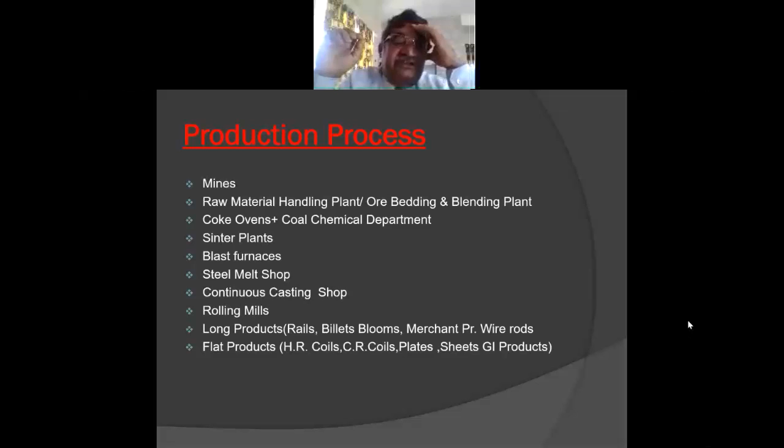Steel is a versatile commodity that plays a major part in everybody's life. As SAIL's slogan says, there is a little bit of SAIL in everybody's life. Whatever you are doing, whether eating, cycling, or anything in your household, many articles are mainly made of steel. Why is it so? Because it is a high strength and resilient material, plus it has the advantage of getting recycled every time. Nothing is wasted in the steel industry.

Since time immemorial, after the Stone Age, the Iron Age came, and from then onwards iron and steel is an industry which has never left humankind. Although many other materials have come up as alternatives, steel is still to be replaced for many applications. It is a very high strength and resilient material.

Most metals are recycled again and go into the melting process. You will also find this as the largest category of material in municipal waste. If you drink a cold drink, the can is made of steel, and anything you touch, you will definitely find some steel in it. So this is the largest category of material being used all over the world.

Now, before knowing the solid waste generated in the steel plant, we should know the process. It starts from mining, then the raw material handling plant. From mines, the steel plant receives material like iron ore, coal, then limestone, to name a few, and they come to either the coke oven coal receiving yard or the ore bedding and blending plant. The coke ovens I will be dealing with one by one, definitely.

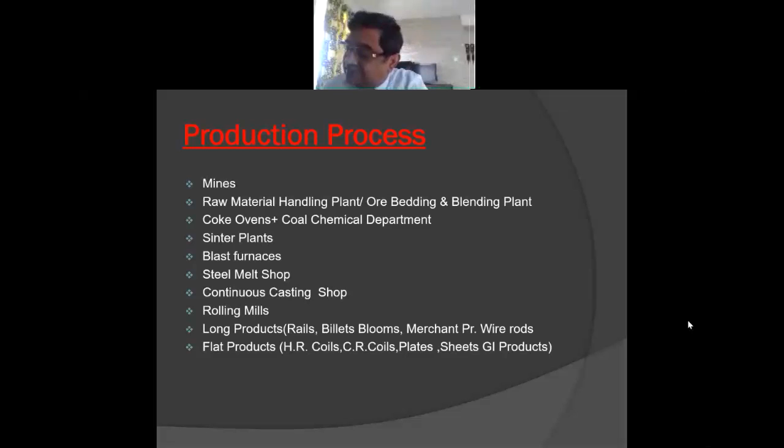So all these processes definitely produce some kind of final finished products and some side products which were called solid waste in earlier days, but now we call them byproducts, as we find some use of this solid waste, chemical waste, gaseous waste, or sludge. We find some use, and these get recycled and regenerated. Hence these are now called byproducts, which help in getting revenue for the plant.

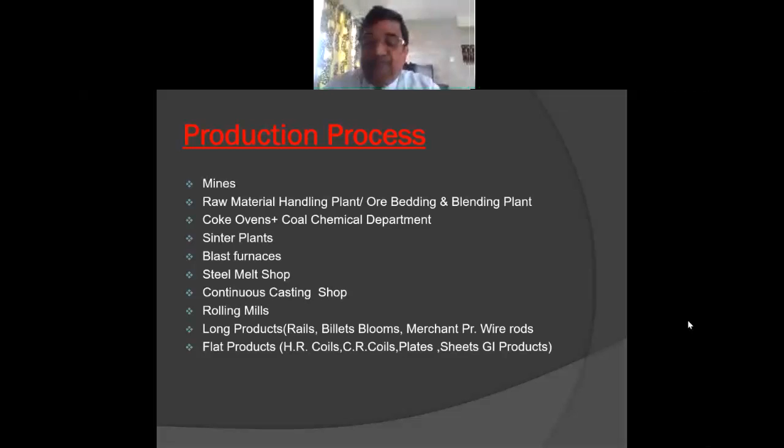So mines, as you know, iron ore, limestone, dolomite, etc. are mined and transported to the integrated steel plant. Mines, I will not deal with in detail, but that also creates a lot of iron ore fines, which earlier were not getting used. Around 60 to 70% was getting wasted as fines.

So all the researchers put together and found out how to make sinters, which are chargeable in the blast furnace, as you must know, being engineers. So the sinter plant was designed and made to work for getting these fines used.

Because in the sinter plant we try to make cakes. We mix it with some conglomerate, and this total mix is passed through the furnace, and this gets fused together. It is basically coke breeze, iron ore, and binding material like lime. When heated up, this gets fused and forms into cakes, which are then broken into chargeable size, and as sinters they are charged into the blast furnace.

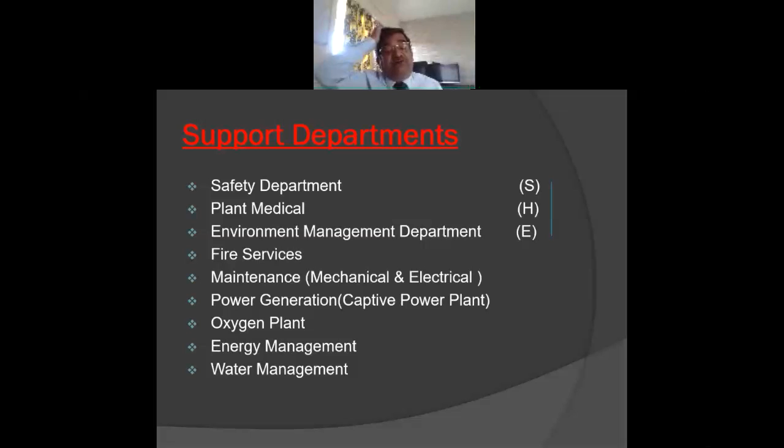Am I getting boring? Please, Madam Sunita, am I getting boring? No, sir, not at all, sir. If it's getting too much, you can stop me in between, no issue.

So that is a place where material is mixed in a proportion and laid as a bed, and blending is also done of different materials for charging into the sinter plant base mix. That's why it is called OBBP, and the raw material handling plant receives iron ore, dolomite, limestone, and all materials which are supposed to be fed into the blast furnace for making iron, hot metal.

And the other stream is the coke ovens, where the coal handling plant handles the coal for coking coal and other types of coals, mixed in different proportions - basically prime coking coal, secondary coking coal, and normal coal dust - mixed in certain proportion, and charged into the coke ovens, where it is heated in absence of air to form coke.

Now this coke is fed into the blast furnaces. So once in the blast furnace, as you know, it is mixed with sinter, iron ore, and coke, and hot air is blown into the blast furnace through tuyeres, making the hot metal. The melting takes place slowly, and it is collected in the belly, which is tapped into the furnace through tap holes, called for tapping the hot metal.

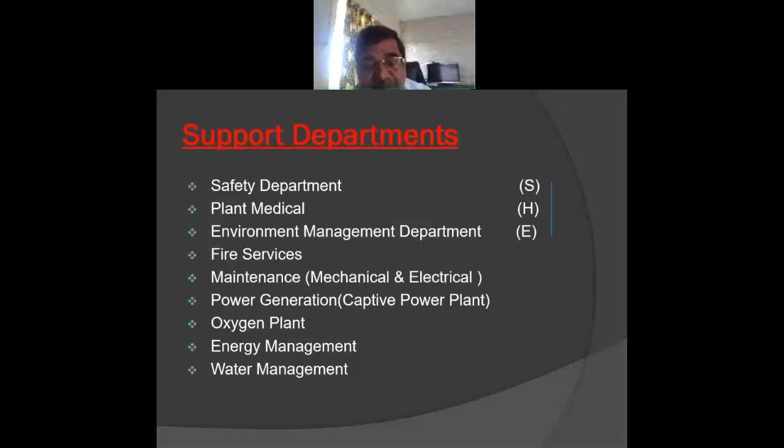Along with the hot metal comes the slag also. The slag, being the lighter material, is basically made of calcium silicate, and this blast furnace slag is passed through a screen of water, meaning water is sprayed onto it, making it into small granules - that is called blast furnace slag. This slag is collected and taken to the slag yards, blast furnace slag yard.

And hot metal is taken into hot metal ladles, and they are taken to the steel melt shop. Now, in steel melt shops nowadays, nobody uses open hearth furnaces. It is basically LD converters or basic oxygen furnaces, because the hot metal is collected in the converters and oxygen is blown into it, where carbon is reduced to minimal level, and then carbon is added back.

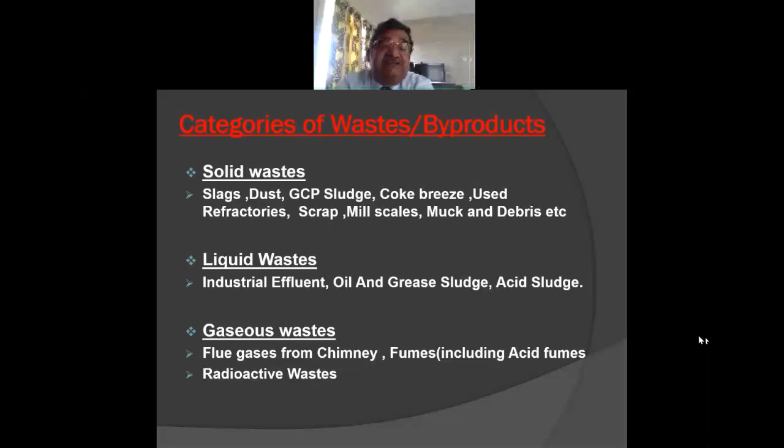Rails must be of high carbon, but carbon makes it more brittle, so some alloying elements are added to make it more ductile. Now this steel which is coming out here, the top portion, the slag is floating. So first the slag is tapped out, and this is called basic oxygen furnace slag, or LD slag.

And from the lower area of the converter, this hot steel is tapped into steel ladles, which goes again to the continuous casting shop, where it is cast into slabs, blooms, or billets for further rolling. Rolling mills can be of two types: for long products, that is rails, billets, blooms, merchant products, wire rods; and flat products like hot rolled coils, CR coil, plates, sheets, and GI products.

GI products means it is hot dipped, galvanizing is done for giving a coat for durability. Similarly, hot tinning lines are also there, where hot dip tinning is done.

So today my topic is not steel making. Today my topic is waste management in the steel plant. To give you an idea, I have given a little bit of the production process, so that you understand all these processes generate some waste which has to be managed. This is a big challenge, which you will see in the next slides.

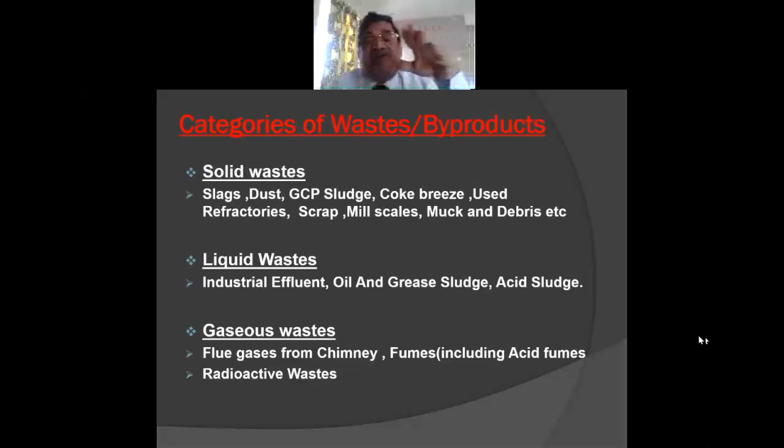We also have environmental concerns. All these wastes are to be processed in such a way that they give minimum impact on the environment. The steel industry is a very polluting industry, and that's why at each stage there are a lot of pollution control equipments to control the emissions and contaminations. With this, I will also go to the next slide.

Now these are the supporting departments. In the earlier slides, I showed you the main production units. Now these are some of the supporting departments. The first is safety department, S. Then plant medical, that is health, H. Then environment management department, that is E. So you must be seeing SHE.

This becomes the most important aspect today in the steel plant: safety, health, and environment. Because as you know, the steel industry is a very polluting industry, and there are a lot of dangers in the total process. So we have given the most priority to safety of the people, health of the people, and the environment, which is available in the plant or in the townships. We are giving full attention to this, and today all the steel plants are really gearing up to make this atmosphere very clean and environment friendly. And for that, all the ISO systems are being followed.

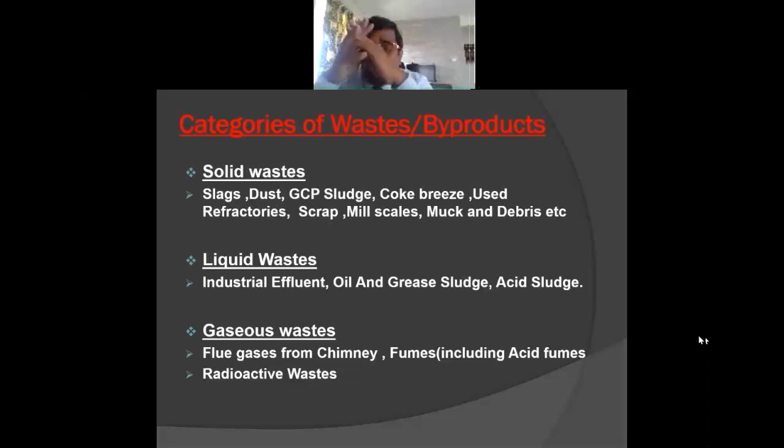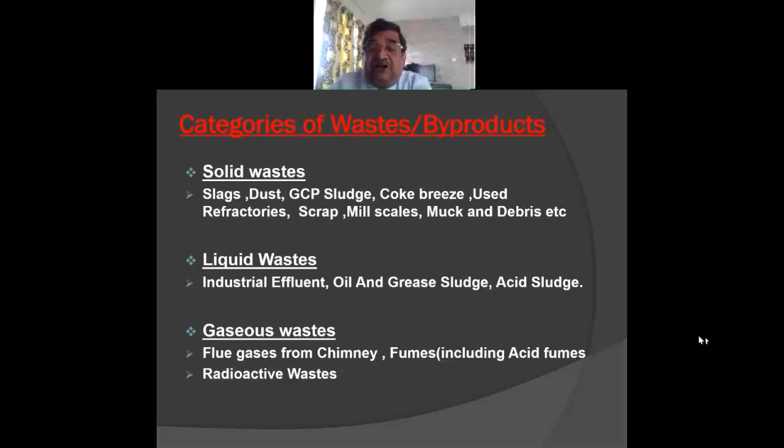Then fire services is another important department, because as you know, we are dealing with fire, heating, and hot metal processes. So, fire services, and then the maintenance department, mechanical and electrical, since all the equipments are to be maintained.

Then power generation is another area which is very important and very polluting. Power generation requires a captive power plant; although we take power from the outside grid, there are certain equipments which are supposed to run continuously without fail. So for those, we have to have an alternate source of power, and the captive power plant exactly does that, because there are many areas which, if they fail, will create havoc in the plant through leakage of gases.

You must be aware that many times cases have happened when the blast furnace gas has leaked into the atmosphere, causing deaths also. Then another area is the oxygen plant. It is normally there for getting oxygen for blowing into the converters.

Then energy management is another area where we are putting all our attention, because when less energy is consumed, it means less impact on the environment. Our aim is to reduce overall energy consumption, and today steel plants are having around 6.4 to 6.5 gigacalories per ton of crude steel, and the endeavor is to go further down to 6 or even below 6.

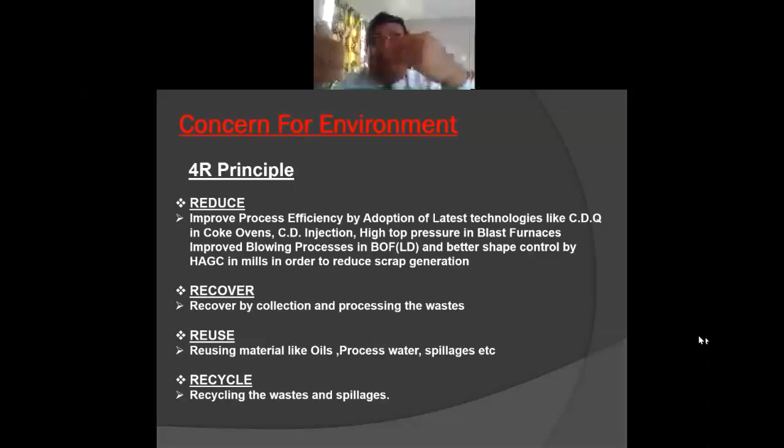Another area of concern in the plant, another resource which is extensively used, is water. And to give an idea, even the makeup water, which constitutes around 3 to 4%, is like 5,000 meter cube per hour. So water is another resource which has to be handled very carefully, and most of the water is recycled.

Now, the steel industry, as I told, all the departments, all these processes generate a lot of waste or byproducts, as we call it. If you consider solid waste, it is slag, dust. GCP sludge, from the gas cleaning plant of blast furnace. It contains a lot of dust. So GCP, once it is washed, it forms a GCP sludge.

And coke breeze. Now coke of size, say 35 plus, 35 to 80 mm, is charged into the blast furnace directly. The nut coke is around 20 to 35, 38 size, that is also charged into the blast furnace. But some minus 15 or minus 20 coke size. Minus means it is less than 20 mm size.

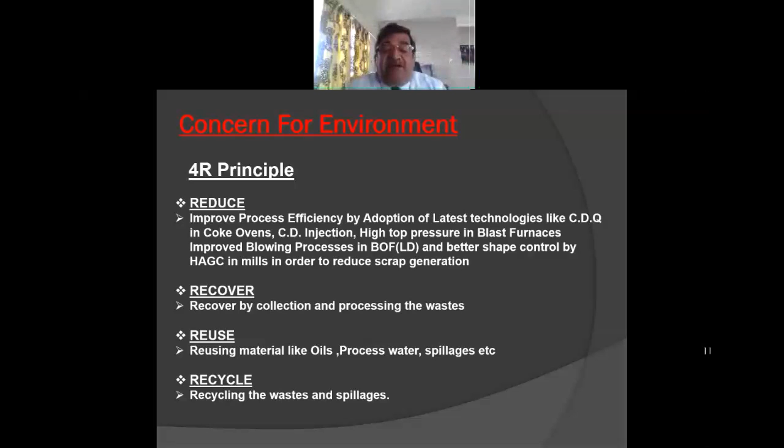Then mill scales are there. So in the process of rolling, we do a lot of descaling, as the scale which is formed on the surface is detrimental for rolling. So in the primary descalers and the secondary descalers, we take out these scales which get accumulated into the settling tank along with the processed water. So this mill scale is also generated in the mills, and a lot of muck and debris are also generated during all these processes.

Then there is liquid waste. As I told you, all the processes require a lot of cooling of the equipment and a lot of cooling of the process material. So these create a lot of industrial effluents. Then oil and grease is extensively used in the equipment, so that also creates a lot of liquid waste in form of processed water getting mixed with oil and grease.

Then acid sludge in the pickling lines when we do the tinning or galvanizing. The surface of the sheet has to be pickled for cleaning. So that is called pickling line. That is done through acids, either hydrochloric or sulfuric acid. So it also forms a lot of acid sludge.

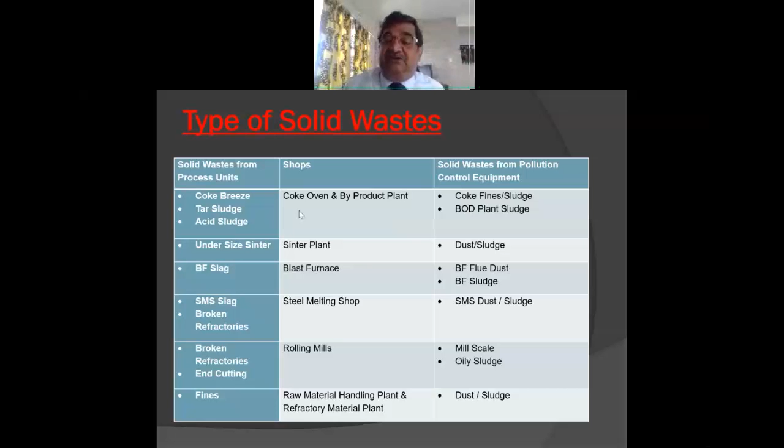That can be done through improving process efficiency by adopting the latest technologies like coke dry quenching in coke ovens, where quenching water is not used; rather, it is cooled by nitrogen initially and then by the coke oven gas itself, so that no water is used for quenching. So CDQ is one latest technology which is being used in coke ovens.

Then coal dust injection in the blast furnace. In coal dust injection, the replacement ratio is 0.9, meaning if we burn 1 kg of coal, 0.9 kg will be effective in heating the air. But we cannot totally depend on coal dust injection, because the total stack in the blast furnace has to have some holding strength, and for that coke is required. But coke consumption is reduced considerably with CDI, that is coal dust injection, and the endeavor is to maximize coal dust injection.

Now the plants are having coal dust injection levels up to 160 kg or 170 kg, even going up to 200 kg in some foreign plants. So this is done through adoption of technologies like high top pressure in the blast furnace. Then we have an improved blowing process in BOF and better shape control by HAGC in mills to reduce the scrap.

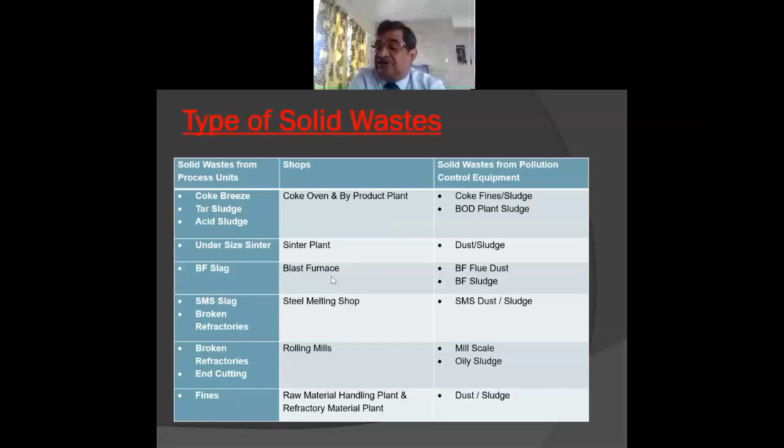Then process water. As I told you, the makeup water is some 5,000 to 8,000 cubic meters per hour, depending on the process and the product of the plant. But the total water requirement in the process is very high. So all this water is cleaned in the primary settling tank and secondary settling tank. Then oil skimmers and oil catch pits are there to take out whatever oil is getting mixed into the water. And this clean water is recycled back into the process.

Then any spillages we always collect. Even the rainwater: when it is heavily raining, some oil gets mixed into the rain from the yards. So we are making check dams for this oil, and oil is getting reclaimed out of it. So wherever possible we are trying to reuse, and with the advent and adoption of ISO 14001, a lot of processes have been adopted to reclaim and recover spillages and reuse them.

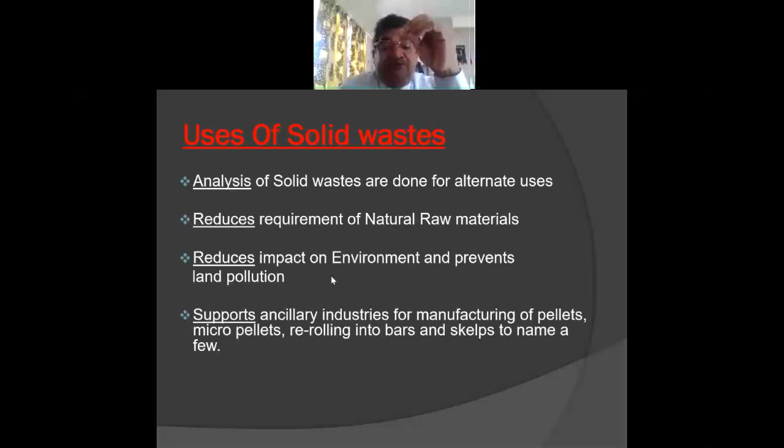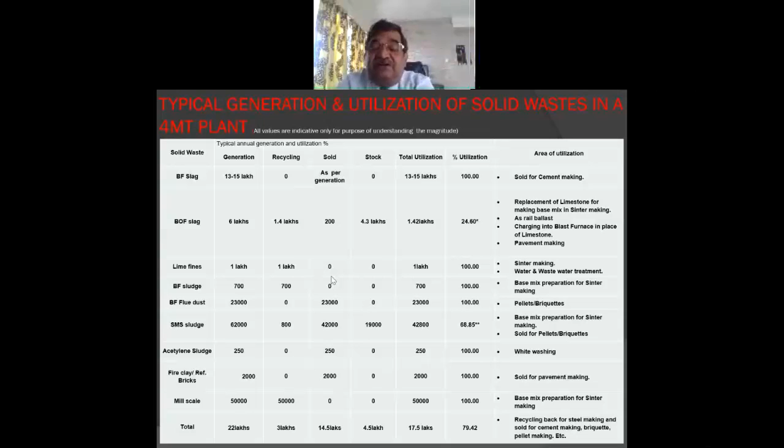As you know, in the coke oven we heat the coal in the absence of air. So it contains hydrocarbons which get converted into gas, and this gas after cleaning is led into the coal chemical plant, CCD, and there we are separating by fractionating method. All of you must be knowing the fractionating tower method, and we separate out different byproducts like tar, benzol, then ammonia, then acid.

All these are separated, and ammonia in a few places is used for making ammonium sulfate, which is used as manure, as you know,

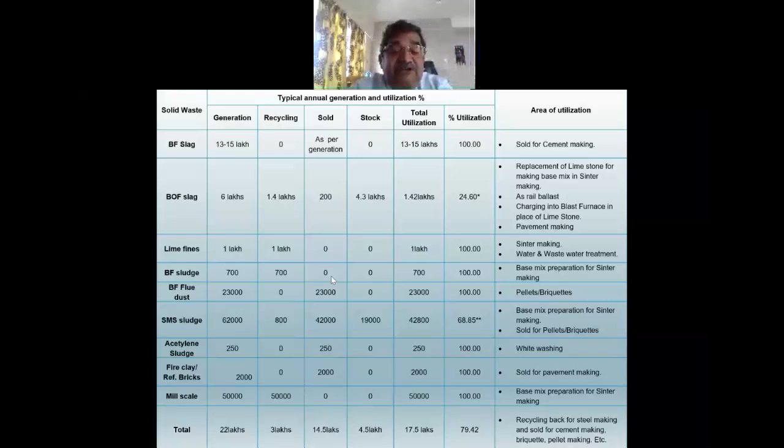Yeah, Raja Khad, I don't remember exactly the name, but Sona Khad, ammonium sulfate. So that is being produced, and sludge, acids, all this tar is sold into the market, and the bottom portion, the tar sludge, is again mixed with coke breeze. It is formed into briquettes, and again we try to use it for burning as a fuel.

Acid sludge also, because acid is also getting produced in the process, and acid is being used for ammonia. This acid sludge is also generated. So after the pollution control equipment, we get coke fines or sludge and BOD plant sludge. Now BOD I will deal with later on.

Then from the sinter plant, undersized sinter is also produced, and there is suction available for letting the air pass through the sinter bed. So it also produces sludge and dust in the chimney. When the gases are emitted out of the chimney, it is washed, and the dust and sludge is collected in the electrostatic precipitators. So that is also a type of waste product from this process.

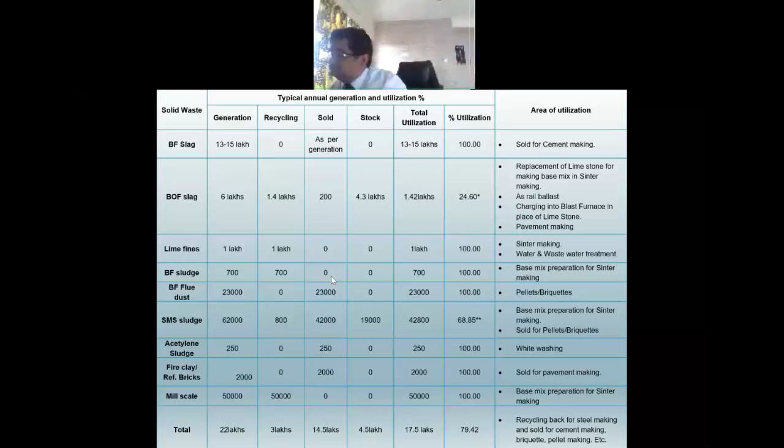Now the endeavor is to maximize the lining life, and good results have been obtained. But nonetheless, after say 2-3 months, or 1 month, the LD converter has to be taken down for replacing the refractories. So a lot of used refractory is generated here. And again SMS sludge, it is through the chimney where the finer dust is washed, through scrubbers and electrostatic precipitator, and collected. So SMS dust and sludge.

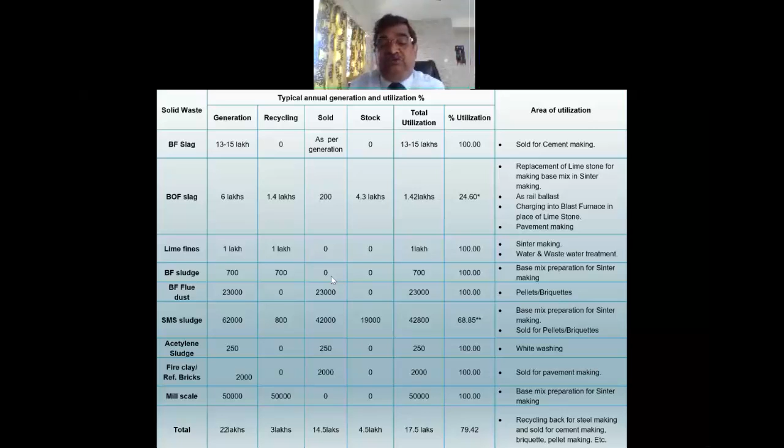And in the rolling mills also, there are reheating furnaces. The reheating furnaces may be repaired in say 6 to 8 months, but sometimes breakdown also happens. A lot of used refractory, broken refractories are generated. And end cuttings, as I told: in the case of long products, it is the front end and back end, but in the case of flat products like HR coil and plates, it will be front end, back end, and side trimmings also.

Now, from the pollution control equipment, the mill scale, as I told, gets mixed with process water. So it is collected in the primary settling tank and secondary settling tank. And in the process, a lot of oil and grease is used in the mills, which gets mixed with the process water. So that is also separated.

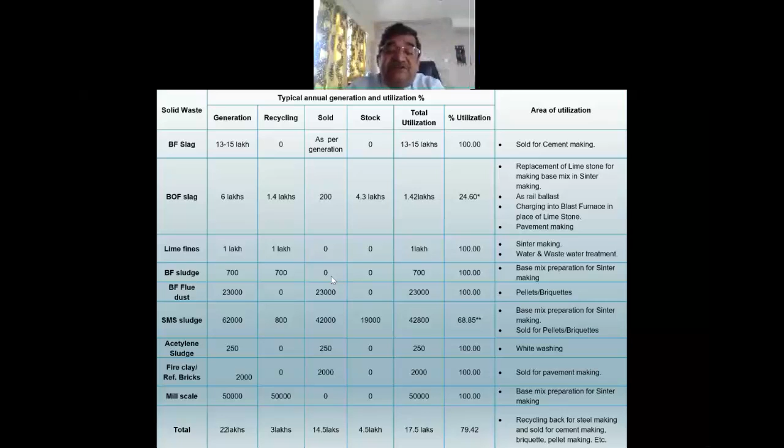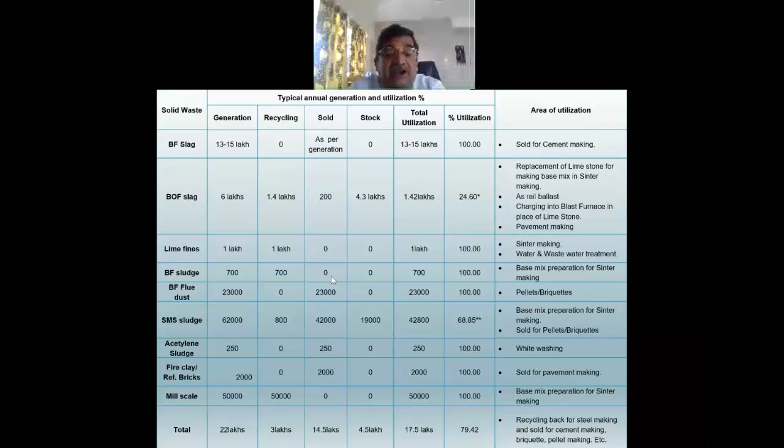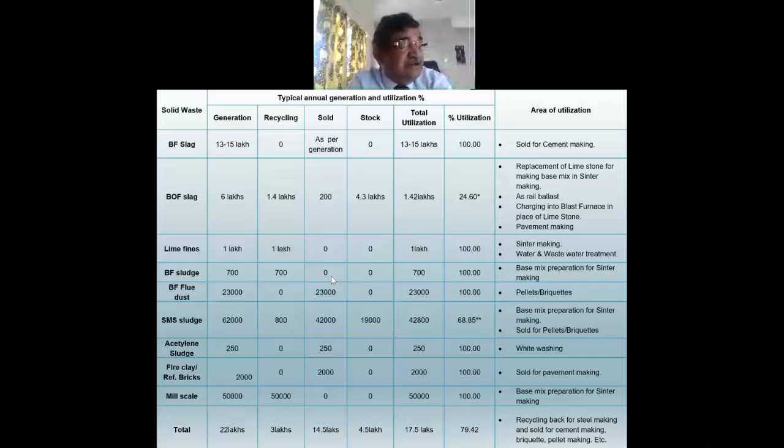And oil is skimmed out through skimmers, and then oil sludge is also getting generated. Then in the raw material handling plant, dust and sludge, because as you know, when we handle material through material handling equipments, it is definitely bound to give rise to breakage of the raw material and getting into dust, and then again sludge sometime, because it is in the open. So when the rainfall takes place, a lot of things are getting washed off into the drains and sludge is formed.

So with this backdrop, now again I told we have to make use of 4 R's. So how do we do it? The analysis of solid waste is being done. What is the composition? What is the size? So analysis of solid waste is done, and alternate uses are found, which we'll see later on. And I can tell you that nothing is wasted in the steel industry. It all gets recycled.

How does it affect? Why do we do it? Why should we bother for solid waste? We could have left it like in the earlier days we were living. Why should we bother? Now, as you know, our Mother Earth is having limited natural raw materials. So all this analysis and use of solid waste are resulting in reducing the requirement for natural raw materials. Thus, we are trying to make these raw materials last for more number of years. At the same time, once we reclaim it and reuse it, it reduces impact on environment and prevents land pollution.

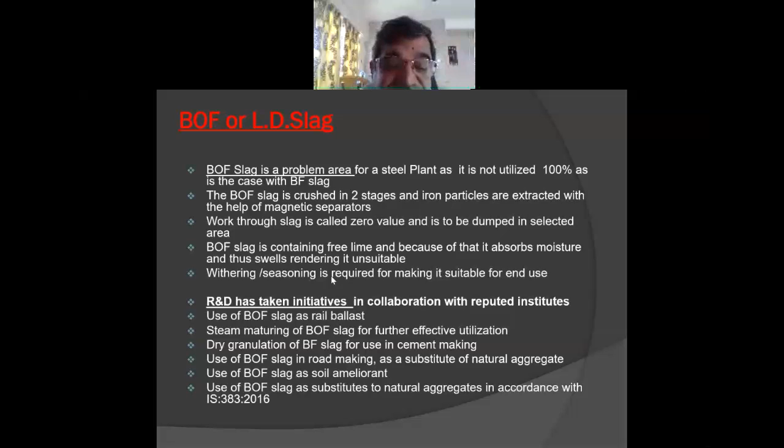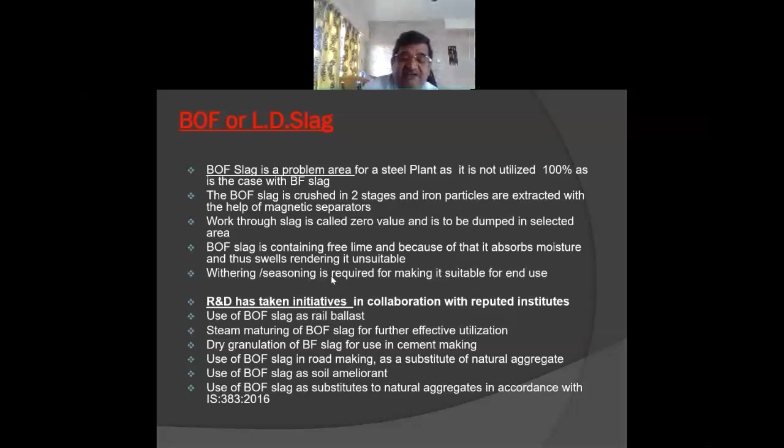And BOF slag is a problem area, as you will see that we are using only 24.6%. That I'll be dealing with in detail. Generation is around 6 lakh tons. We recycle around 1.4 lakh tons. We have not found many alternate uses for selling it outside, but we have been doing a lot of research work, which I will discuss in detail later on. Total utilization is around 1.42 lakh, which constitutes only approximately 25% utilization of BOF slag, that is the SMS slag or the LD slag.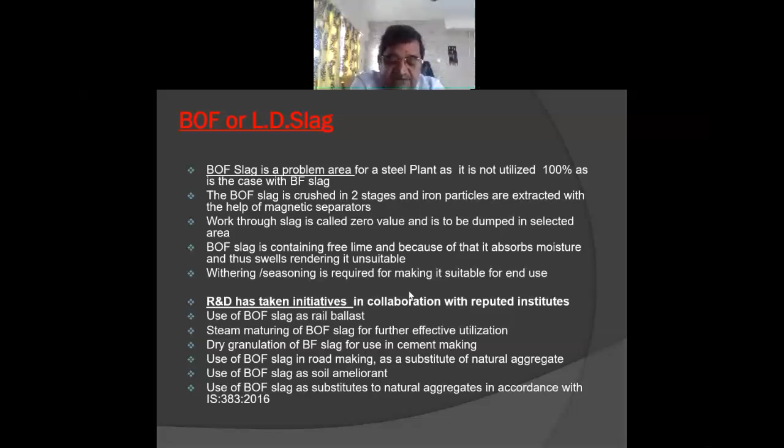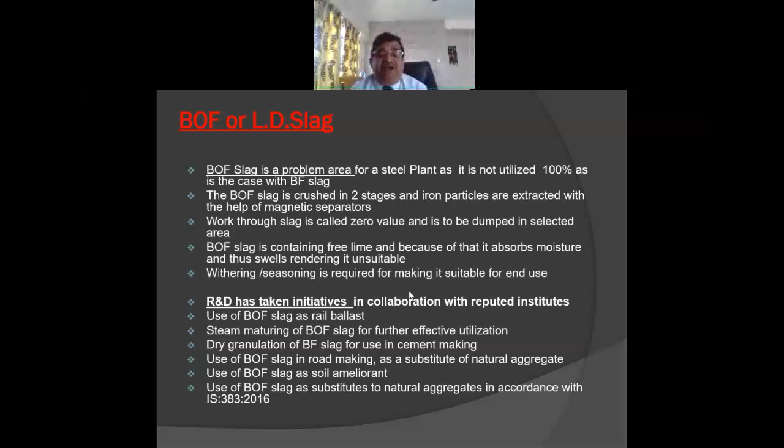Lime fines: burnt lime is required in the process of blowing and in the charging into the blast furnace. So lime fines are generated, around 1 lakh tons, and this is 100% utilized in sinter making. As I told, in sinter we mix coke breeze, iron dust, iron ore fines, and lime as a binder, and we heat it. We mix it with water, and the paste is charged and passed through a furnace, and we force hot air to pass through the sinter bed, making it into sinter. Some reduction takes place in sintering, which eases the reduction process in the blast furnace, because the blast furnace is a reduction process for making the hot metal.

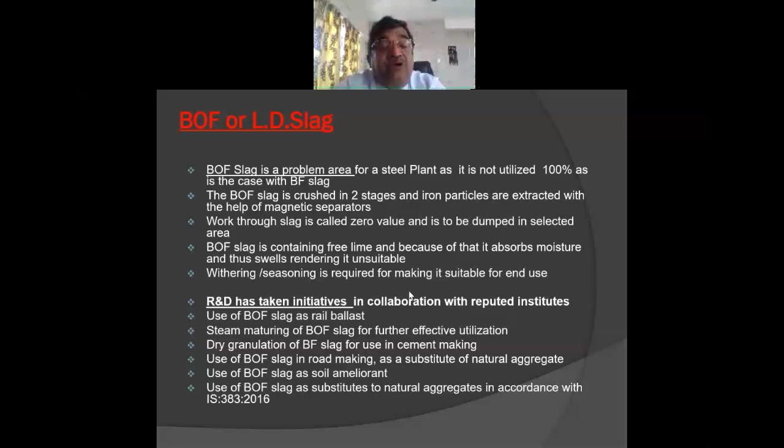Then BF sludge, the sludge collected from the BF chimneys, from the electrostatic precipitator, and BF flue dust go for sinter base mix preparation, because sinter is a basic product which is charged into the blast furnace. So we try to use all the iron particles and all resources generated as solid waste in sinter making.

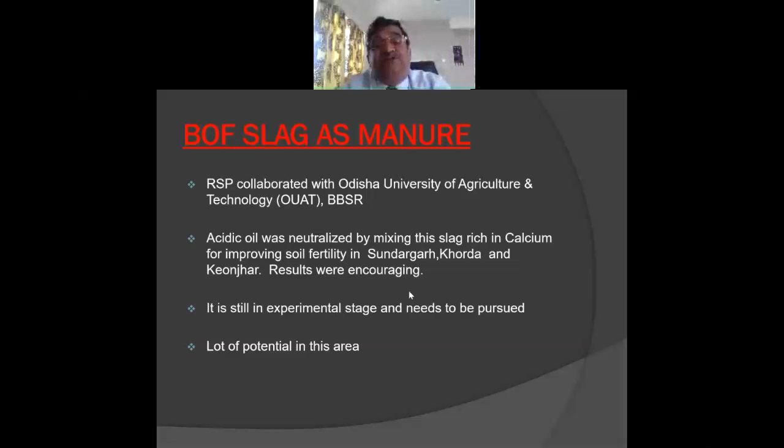Then blast furnace sludge, as we see that it is very fine, so it is BF flue dust, it is very fine. We also try to make pellets out of it and briquettes out of it, again for melting purposes.

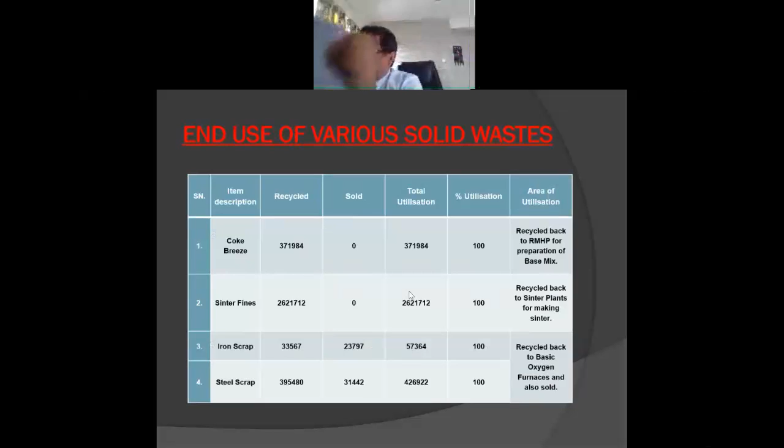Then oxyacetylene gas is extensively used for cutting. So we have acetylene plant. So acetylene sludge, that is a lime. It is produced through a process which uses... acetylene gas is generated, but the acetylene sludge is a type of lime which is used for whitewashing.

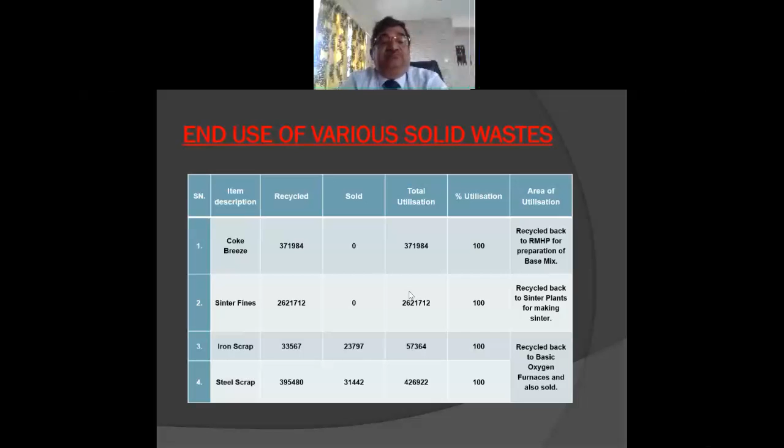Then fire clay and refractory bricks, I told that a lot of refractory bricks are getting generated. So high value refractory bricks are sold outside, and fire clay and refractory bricks are sold 100%. So that can be utilized for pavement making of the road, and lot many uses. As a landfill also you can use wherever walkway is required to be made. These fire clay and refractory bricks are very much useful.

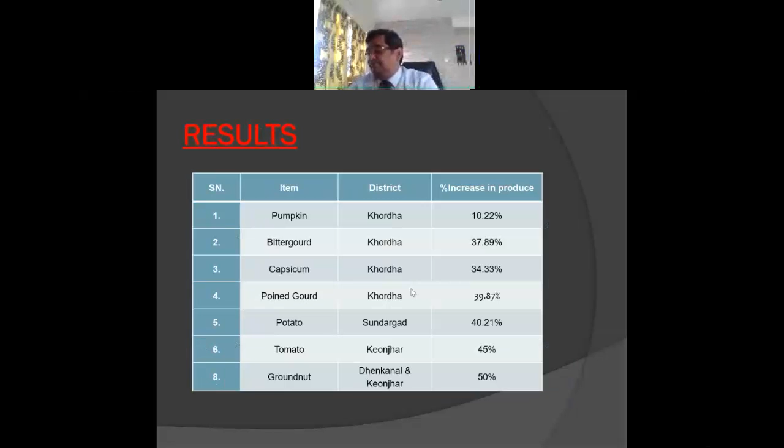Then mill scale, it is getting generated up to the tune of 50,000. All the quantities are in tons. So 50,000 tons is generated. It's typical for a 4 million ton steel plant. The quantities may vary here and there for various plants, depending on the process and the technology adopted.

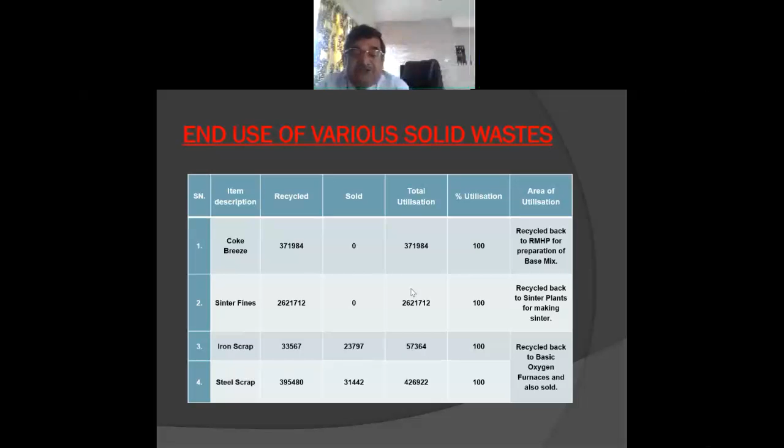So this mill scale totally goes into base mix preparation, because it is iron oxide. So it is pure iron oxide, and this is used in sinter making for again charging it into blast furnace.

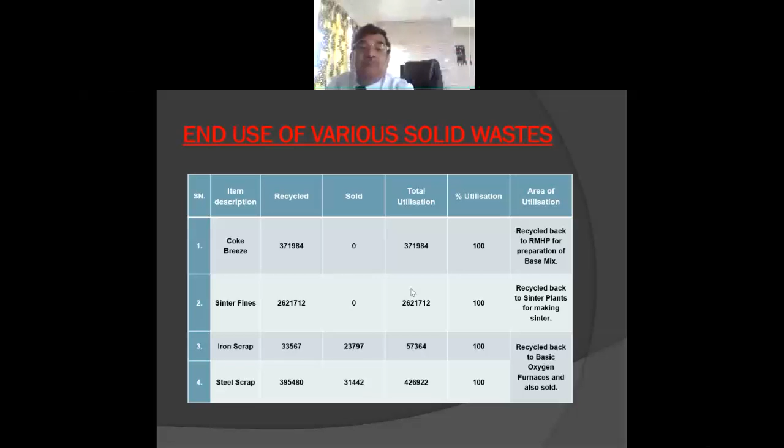Thus we can see that around 80% of the solid waste are getting utilized or recycled back in steel making, like blast furnace slag is sold for cement making. Then the BOF slag, which I will be dealing in later slides, and pellet making, etc.

So as I told, BOF slag, you must have seen that we are using only 25%. So it's a problem area for a steel plant, as it is not 100% utilized as in the case of blast furnace. The BOF slag, after getting unloaded, it is into a solid form.

Just a minute, please.

So BOF slag is a problem area for steel plant as it is not utilized 100%. The BOF slag is crushed in two stages, and by magnetic separators we take out the iron particles. Now these iron particles are either charged into the blast furnaces or also sometimes in the LD converters as a coolant, and also going to the sinter making.

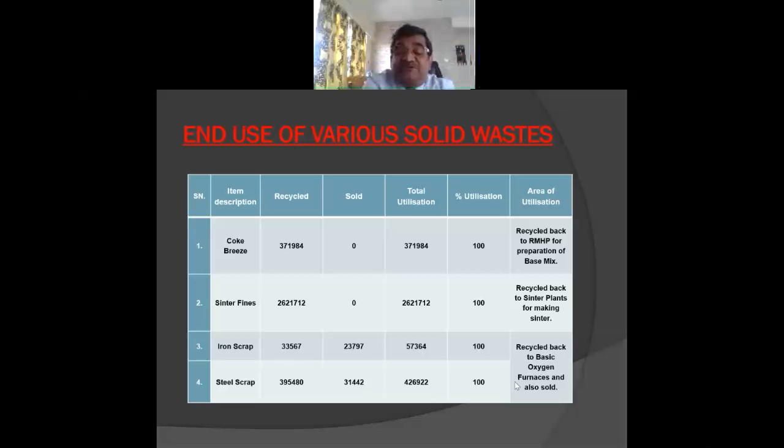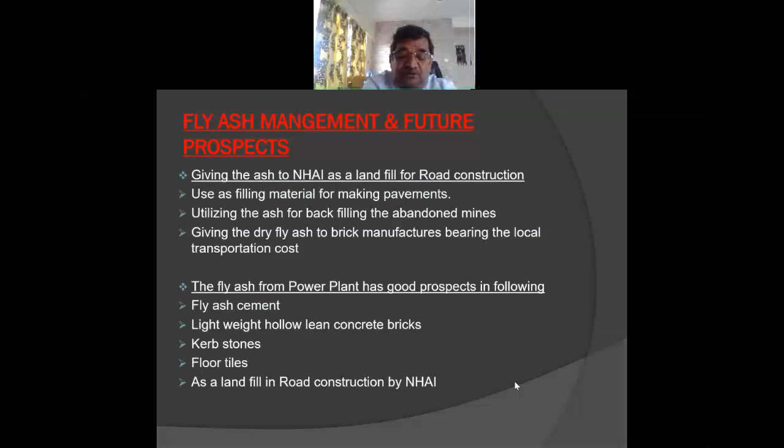So that's why it is not used as a material, though it has got a potential to be used in road making as a replacement for the stone chips. But because of the property of absorbing moisture it is not getting used, because it will get swelled and the road will get damaged. So before using into these areas, withering or seasoning is required either through natural resources, and nowadays we are trying to mature it faster by steam maturing.

So to solve this problem of BOF slag, R&D has taken certain initiatives in collaboration with reputed institutes. Now, use of BOF slag as a rail ballast. We have tried using it as rail ballast. The railway requires a lot of stone chips as ballast. BOF slag is there, but the strength is not there, and swelling of the chip. So we have tried steam maturing of BOF slag for faster maturing and effective utilization.

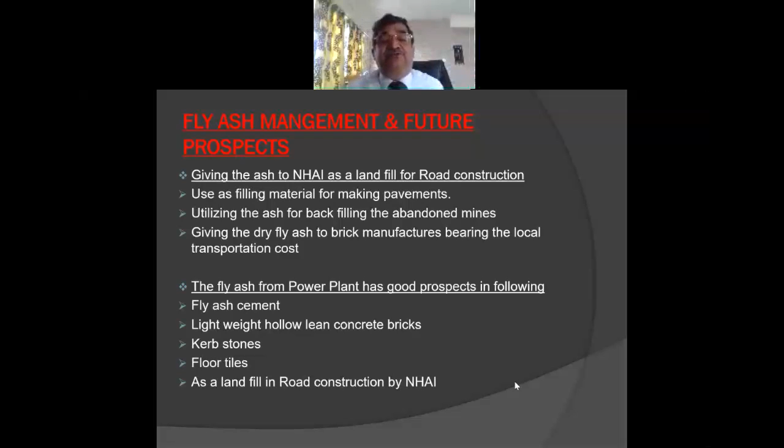This project was carried out by Professor Santanu Mahanti and his team. There is a lot of scope in this area if it is really successful, but it is still being pursued.

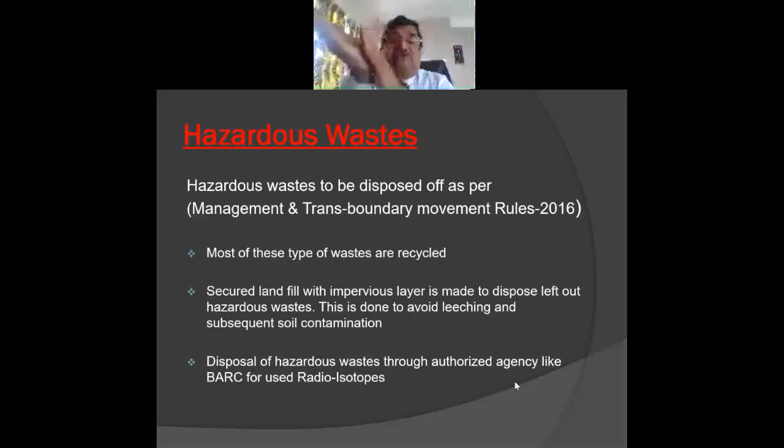Now, to give you an idea of quantities generated: Coke breeze around 3,72,000 tons, sinter fines around 26 lakh tons, iron scrap 33,567 tons, and steel scrap around 3 point something, around 4 lakh tons.

All these are 100% utilized. Coke breeze goes to the raw material handling plant for base mix preparation for the sinter plant. Sinter fines generated are again fed into the sinter plant for making sinter.

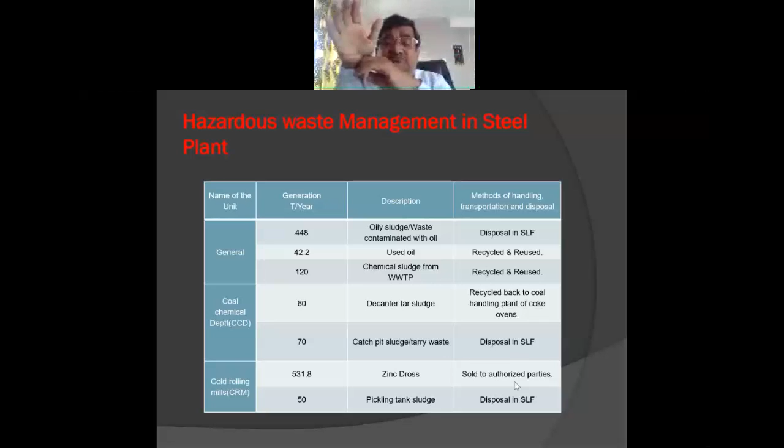Iron scrap and steel scrap both are going into the LD converters, that is basic oxygen furnaces, because 15 to 20% charge in the LD converter is metal scrap. This iron and steel scrap is also used as a coolant. Once you charge the hot metal into the converter, the bottom portion of the converter gets the impact energy of the hot metal. So to reduce that impact, we charge the iron scrap and steel scrap first in the bottom, so that the impact is less.

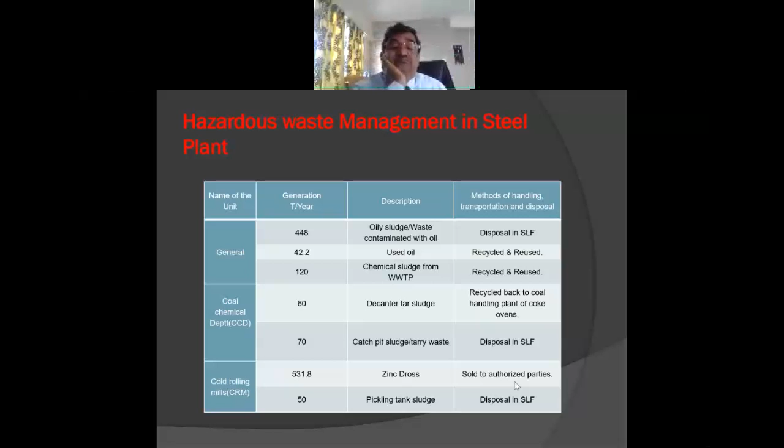If I am not clear or you have any doubt, please interrupt me, madam. Hello? Yes sir, hello, yes yes sir. All of you got bored, huh? No sir, actually first you complete, at the end they will be given a chance to ask questions. Definitely, because if it were one to one interaction it would be easier talking in between. But here it is not. That's the problem in online, sir. But that is a better way of explaining the thing. Yes sir, anyway, definitely.

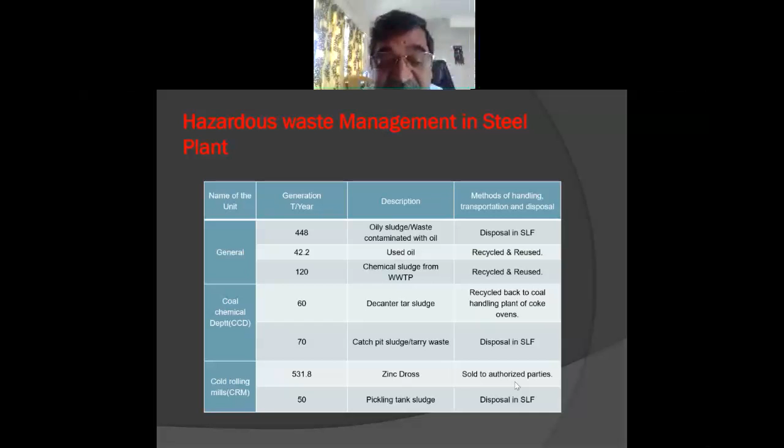So these are the end uses of solid waste. Then power generation is another area. We have captive power plants for making available uninterrupted power to certain units of the steel plant which are required to run continuously. If they stop, they will play havoc in the form of leakage of gases or other issues, or it may damage the equipment. Suppose the water supply in the blast furnace is stopped, then the whole equipment will get damaged, and at times it damages certain things.

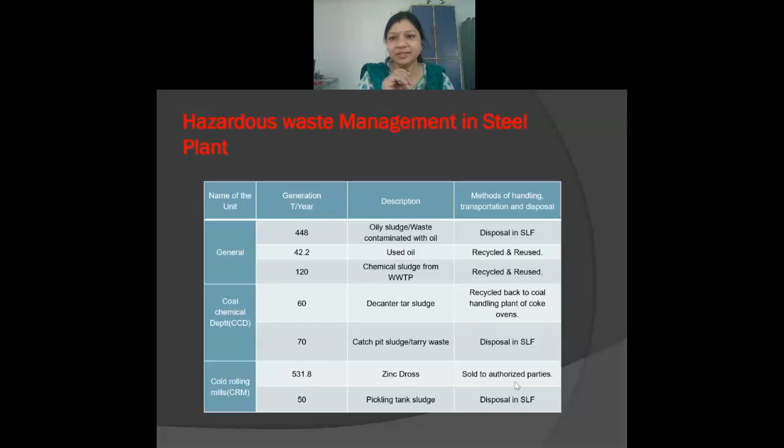Effectively and very cautiously, so that spillages are not there. But there are a lot of end users and future prospects for the users of fly ash.

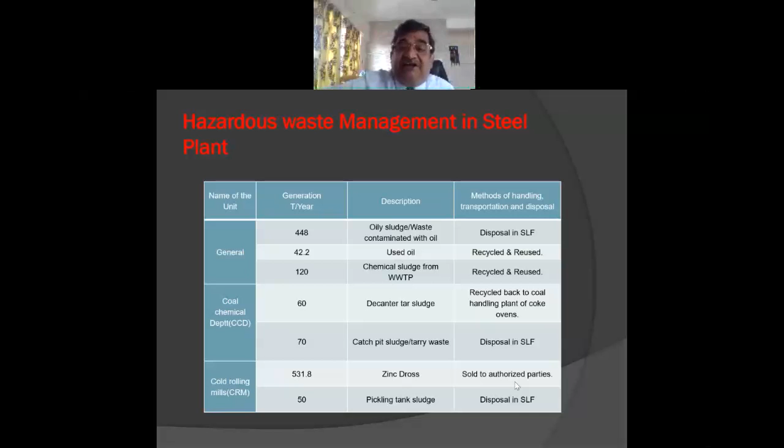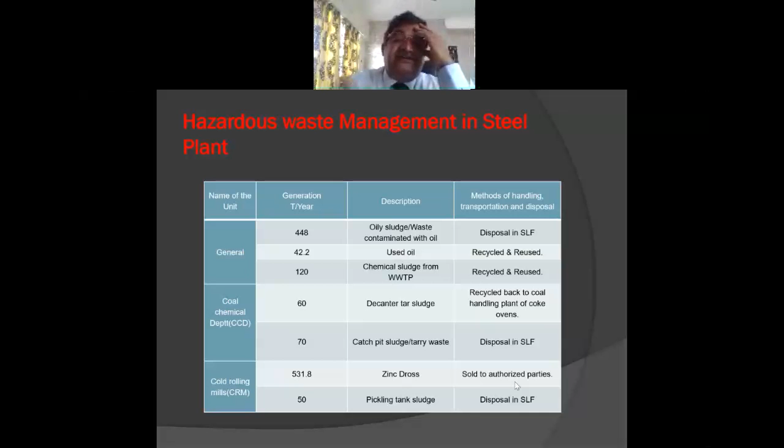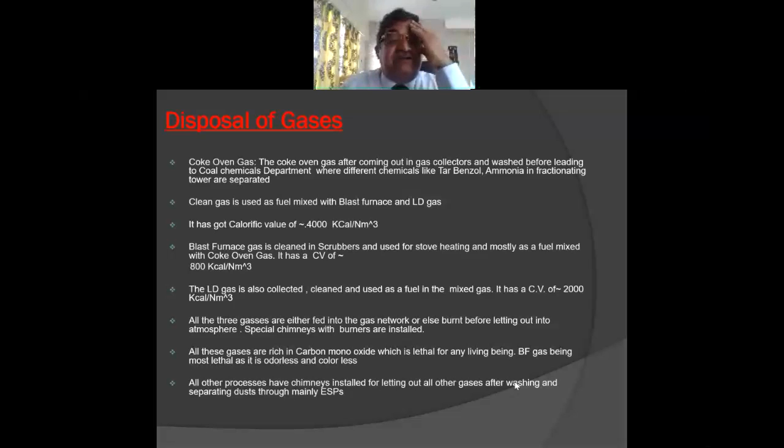It's used for filling abandoned mines, to dump this fly ash. Say 5 or 6%, maybe 10%, has become mandatory by Government of India to use fly ash. But there also we have to bear the local transportation cost.

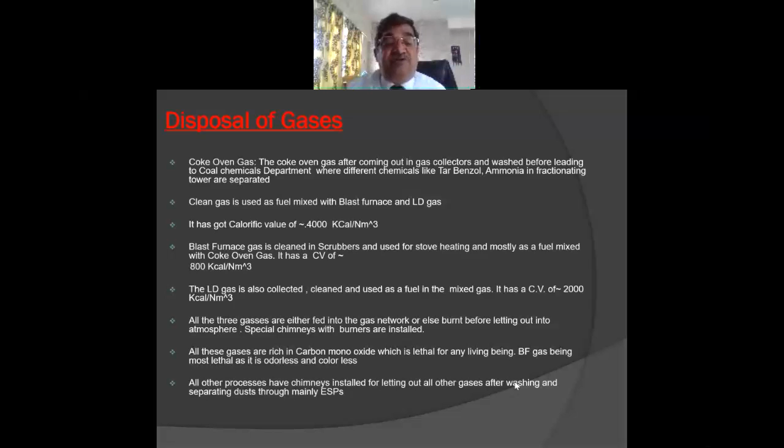From coal chemical department, tar is getting separated, so most of the tar is utilized. Decanter tar sludge - the tar decanters are there where the tar is getting collected. So this tar sludge is recycled back to the coal handling plant for mixing with coal for charging into the coke ovens. It also improves mixing of this tar into the cold chargeable coal, which is a powder.

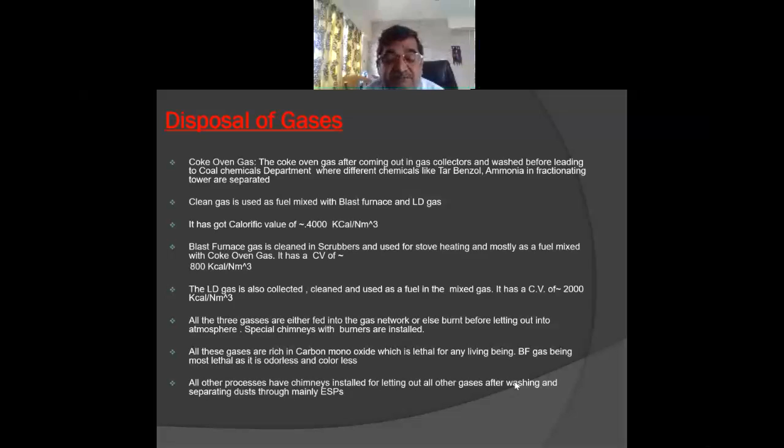Sizes are fixed because more than say 10mm plus 10mm size coal is there. So that is mixed with coal for getting charged, and this gives better coke properties. I don't know whether MICUM values and other things are known to you, but these are improved by this use of tar decanter sludge.

Then from coal chemical department, catch pit sludge and tarry waste - whichever is not getting recycled back is disposed in the secured landfill.

From cold rolling mill, we get zinc dross. Now, when we heat zinc, zinc bath is used for galvanizing. Boiling zinc is there through which the sheets are passed for coating. Now, after use, some spillages and other things get solidified, which is called zinc dross.

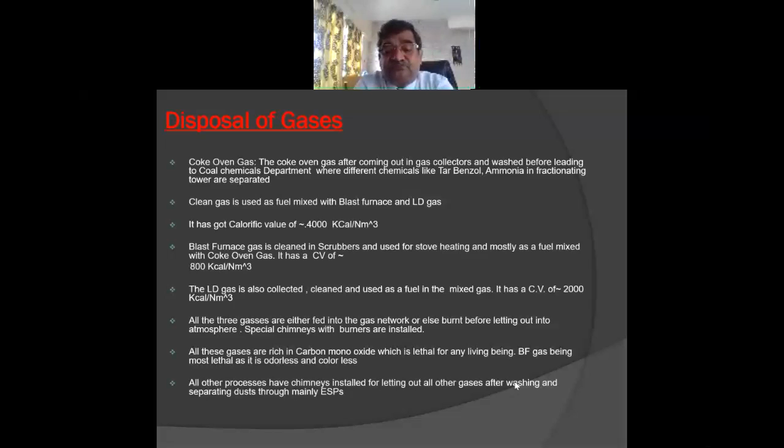The idea is to improve the process to reduce the generation of zinc dross. Whatever zinc dross is produced is sold to authorized parties - we cannot sell to everybody, but there are authorized parties to which this zinc dross is sold.

Then there is acid sludge, because pickling is done by acid, so acid sludge is disposed in a secured landfill. Besides, there is sludge containing heavy metals, because steel uses chromium, nickel and other alloying elements, so this sludge always contains heavy metals which get leached into the soil, and once it leaches into the soil it can mix with subsoil water used for drinking and contaminate it. So it is very important that we make an impervious layer, a secured landfill, and dispose of all these types of sludge into that secured landfill.

Now I have dealt with solid waste and liquid waste. Now coming to disposal of gases.

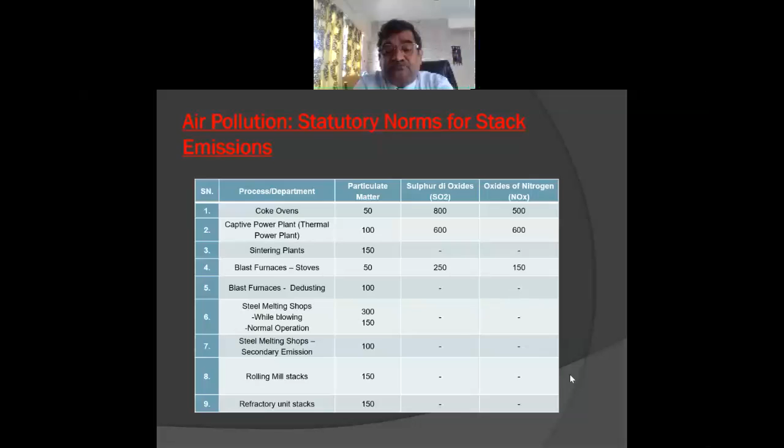The coke oven gas - once we heat the coal in the ovens, the hydrocarbons come out as gases, around 30% by weight. Around 68% is pure carbon, and the rest comes out in gaseous and moisture form, containing carbon monoxide, carbon dioxide, ammonia, and other gases.

It also has some coal dust and other things which go to air wash - this gas is washed, and then through an electrostatic precipitator, whatever suspended particles are there get separated.

The clean gas then goes into the fractionating tower, where tar, benzol and ammonia are separated. Tar being the heaviest gets separated first, then benzol, then ammonia.

Ammonia is also reacted with sulfuric acid, producing ammonium sulfate as manure, which we sell outside - at least Rourkela has that facility.

Ammonia is separated and uh,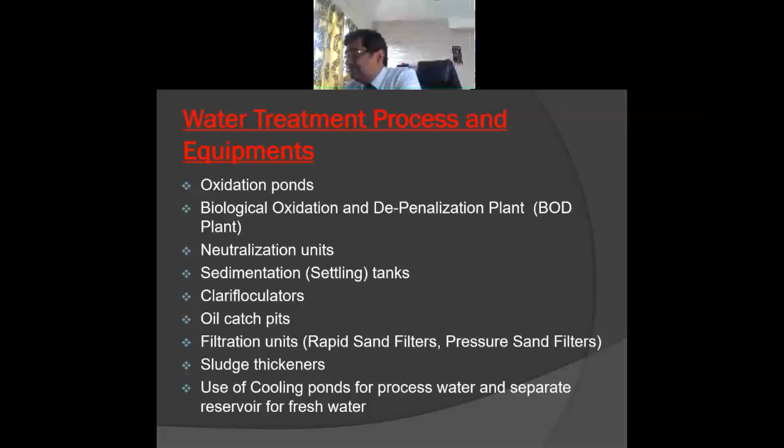But one thing is that if any gas is to be let out into the atmosphere, it has to be burnt, because it contains a very lethal gas, that is carbon monoxide. As you know, if it goes into the human body, the oxyhemoglobin converts into carboxyhemoglobin, which is very lethal and causes death.

So even if somebody says they are dizzy, or that they went to a gaseous place and feel dizzy - meaning they got exposed to gas - we necessarily have to take them to the ICU and keep them under observation for at least 2 to 3 days before they normalize, and oxygen is given to that person.

Blast furnace gas is supposed to be the most lethal gas because it is colorless and odorless, and nobody knows that gas exposure is about to happen. Sometimes cases have happened where people get affected by the gas without warning.

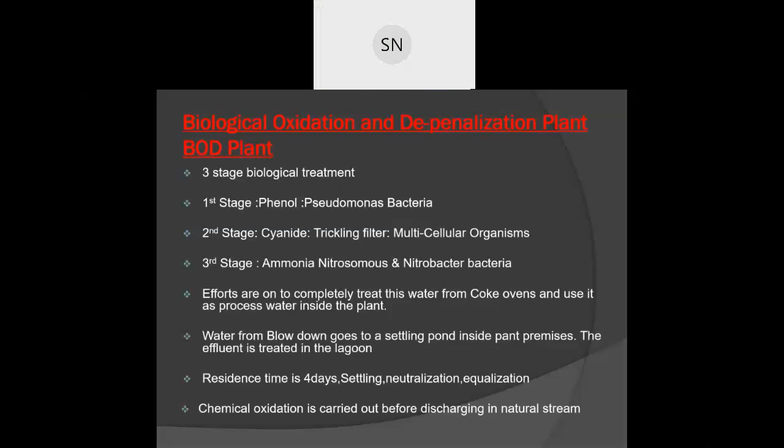So we try to avoid this. If gas is to be let out into the atmosphere, it has to be burnt.

And burners are there, special before letting out the atmosphere. Air pollution.

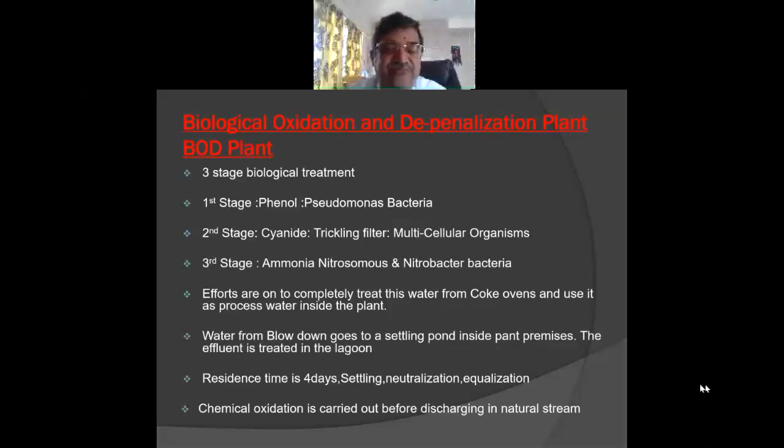हाँ बोले. Sir, sorry to interrupt, sir. Actually, another session is at 3:30. Kindly try to wind up before 3:20. हाँ, I will. Okay, time हो गया. पता नहीं चलता है.

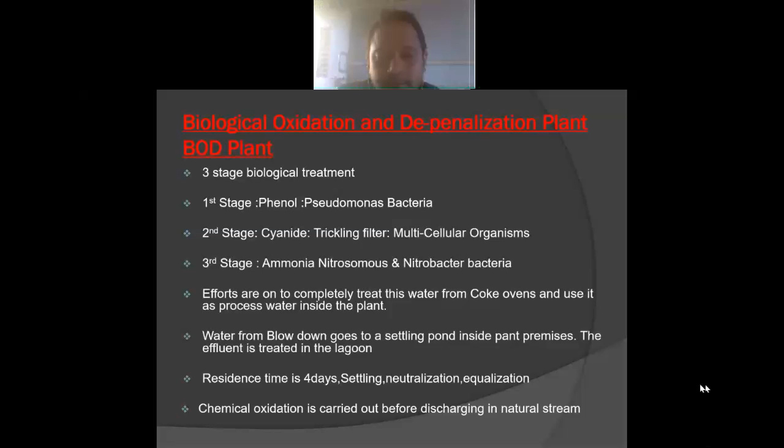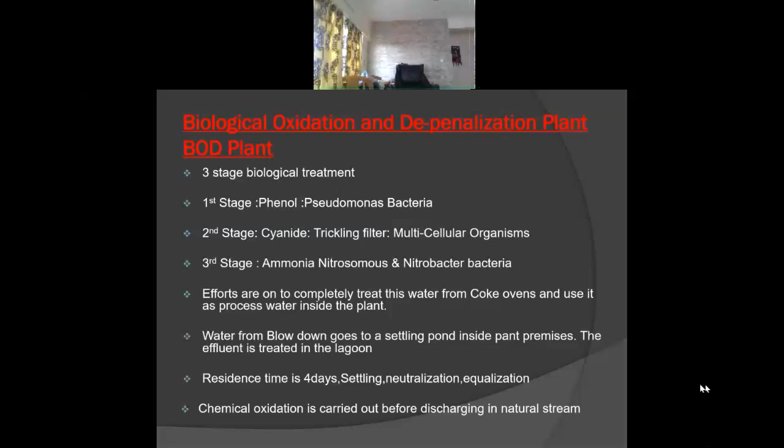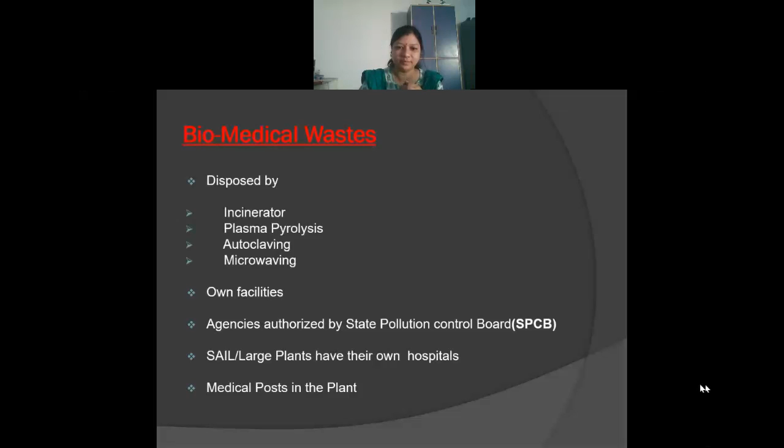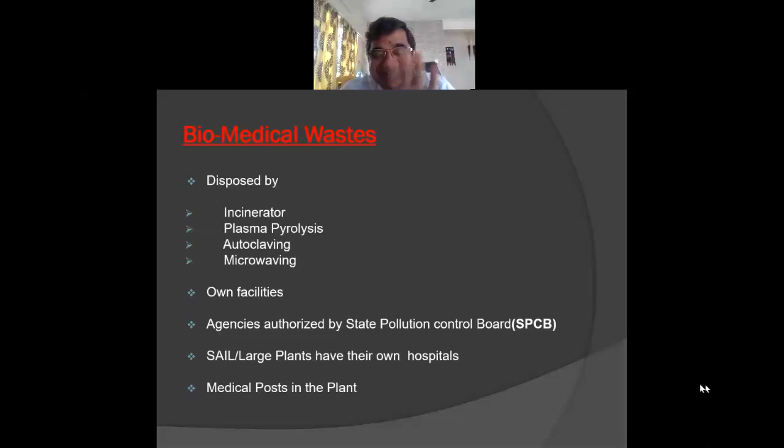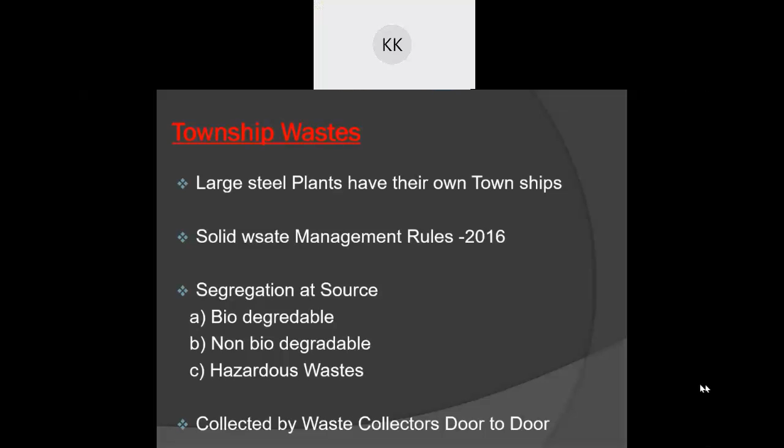Now coming to the water treatment plant, wastewater is treated, and the treated water is recycled back into the process, and fresh water is taken only as makeup water. All the industries are going for zero liquid discharge. That is, no blow down water will be given.

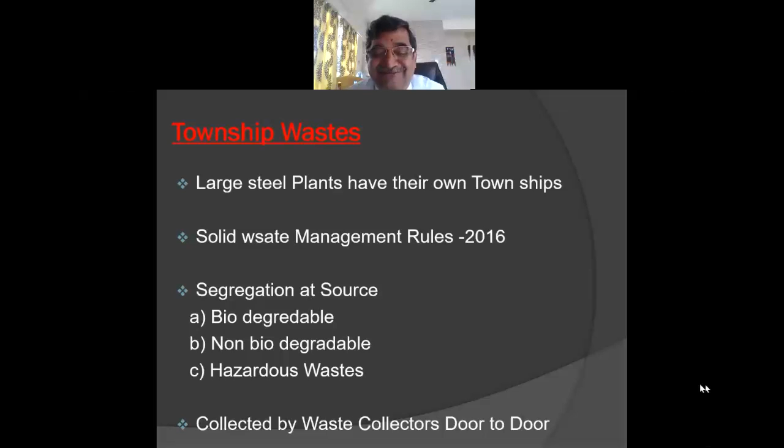All plants are having townships, so the sewerage water is also treated. This sewerage water cannot be fed back as potable water, but it is treated and fed into the process water system of the plant as makeup water, so that the requirement of makeup water from the fresh pond is less. And special water treatment plants are being set up to make it suitable for use as process water to stop blow down completely. So zero liquid discharge we are trying to go.

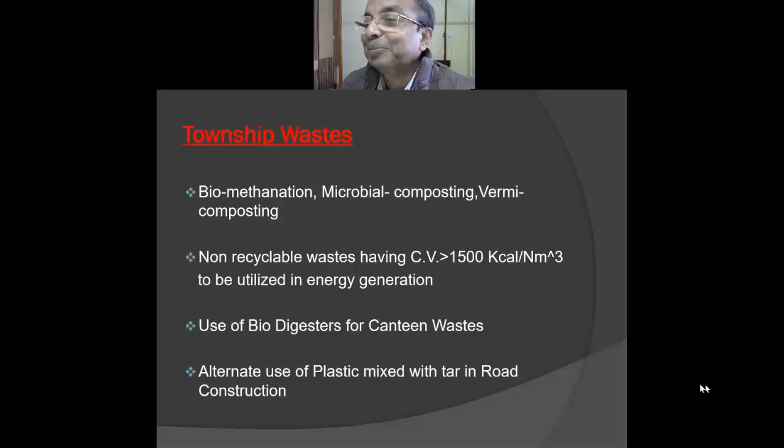Now CDQ. Coke was being formed by heating the coal in absence of air, and then cooling it by quenching through water. But it creates a lot of phenolic water and hazardous chemicals, which is detrimental for health. So now CDQ, that is coke dry quenching, is adopted in order to avoid water quenching. This improves the coke quality as well as reduces hazardous waste generation.

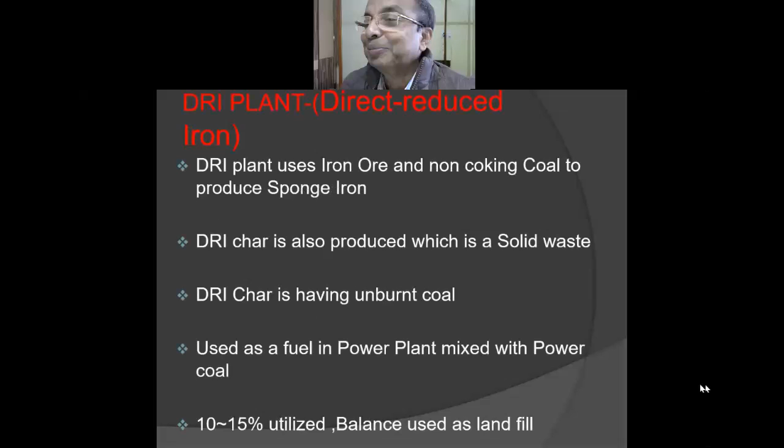Now wastewater treatment processes and equipments are like this: oxidation plant, biological oxidation and dephenolation, popularly called BOD plant. There are also COD plant, then neutralization units, where we use certain additions to neutralize the effluent. Then there are primary and secondary settling tanks. In the primary settling tank, heavy particles are separated, then in the secondary settling tank, fine particles are separated.

Then clariflocculators are there, large centrifuges, where the water goes outside and the impurities get collected and dried. Earlier these two things were happening in two separate units. Now clariflocculators do both: cleaning water and drying the sludge or muck collected in the center.

Then oil catch pits. When oil gets mixed with rainwater and other things, these oil catch pits are there to remove the oil, because the oil floats on the top surface of the water.

And in the primary and secondary settling tank, there are skimmers which skim out the oil, and this oil is collected through a pinch rope system as it is separated out. And I must tell that once it is separated out, this oil is reclaimed, certain treatment is done, and then it is reused.

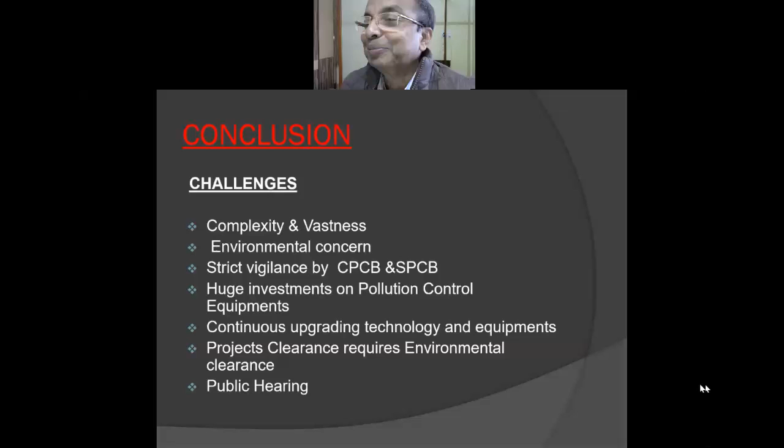Then the filtration unit, that is rapid sand filters and pressure sand filters, are there to separate out any particles. जैसे आपका रेत में छानते हैं पानी, वैसे ही मतलब the natural sand filters are there, and pressure sand filters are there where we force water through the sand filters. Then sludge thickeners are there, which I told, the clariflocculators. So sludge is thickened, which is left in a certain area and then dried up.

Most of the plants, like Russian plants, have two separate water resources or water ponds. One is meant for the processed water, where all the processed water comes in and is taken back into the system through that pond, so the impurities get settled there. And a fresh water pond is there from which the makeup water is taken into the processed water pond. So this is a system so that no contaminated water flows out.